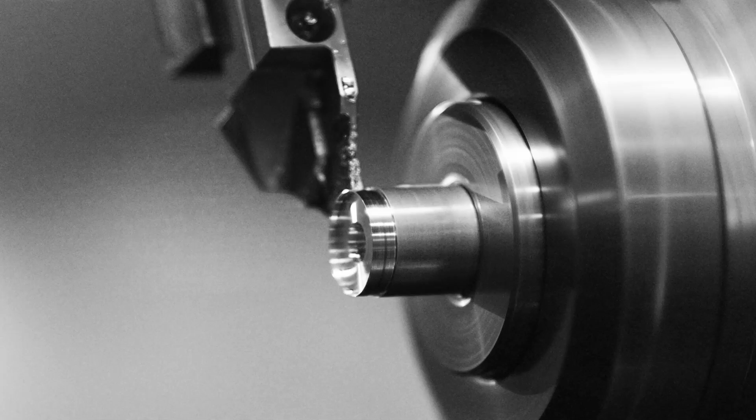Today I'm going to tell you about a machine that is available from stock at MTD UK. This is a Correa Norma 20 milling machine.

These machines are very popular amongst companies that need or demand flexibility within their machine shop and have requirements for a much bigger working envelope.

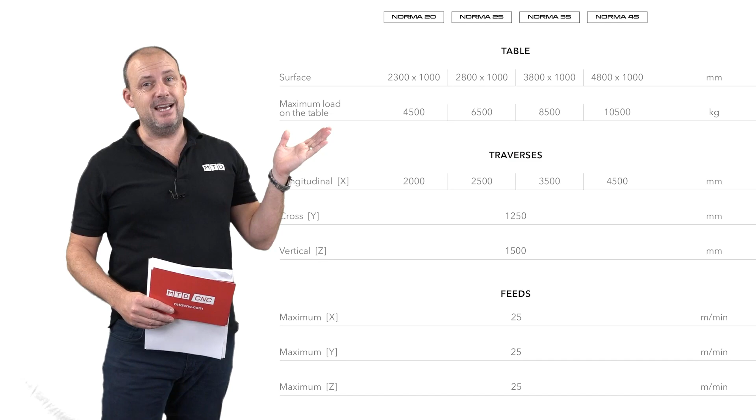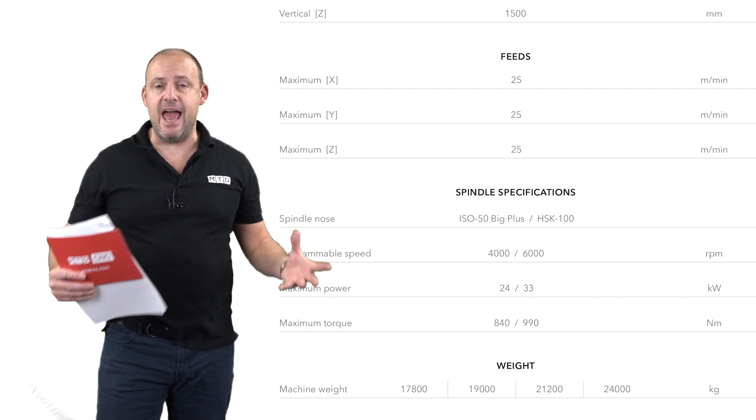We're going to put on screen now some of the specifications of this machine. You'll see we've got a 2 meter X-axis, a 1.25 meter Y-axis, and also a meter and a half in the Z. This enables companies using machines like this to not only handle heavier and larger components, but also to get more versatility in their machining by maybe having two different components or two different jobs on the table.

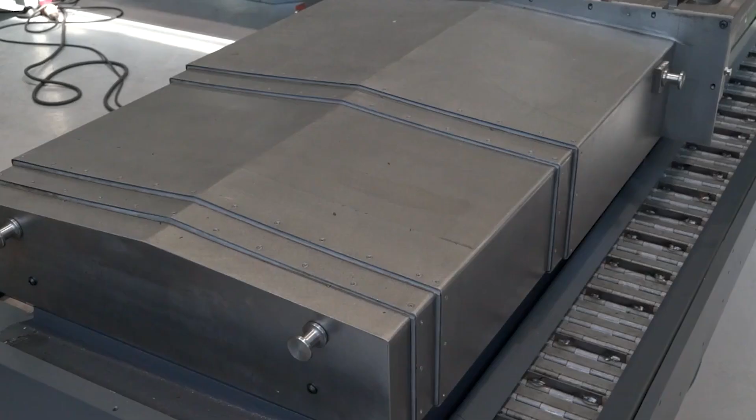This particular machine is a very cost-effective model. In fact, the Norma has been selling around the world for many years and does fit into traditional machine shops.

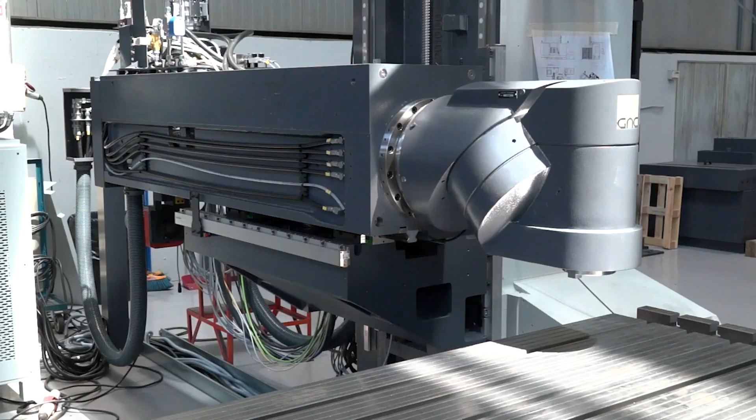Interestingly, the head on this particular model is quite a basic head. It's a manual positioning head, but this brings the cost right down on these machines, while still giving maximum flexibility to not only machine the top faces, but also do those angled features as well. The particular model we're talking about in stock is available on a very short lead time.

As standard, this machine comes with either a Heidenhain or a Siemens control. You can have either control with this machine, and there are models available with either of those. It comes with things like the portable hand wheel.

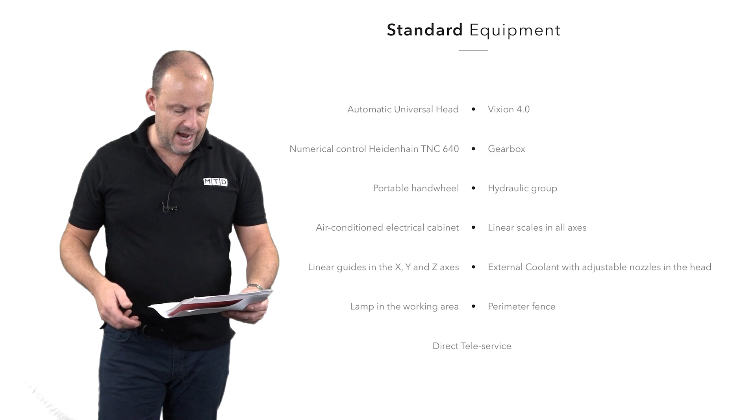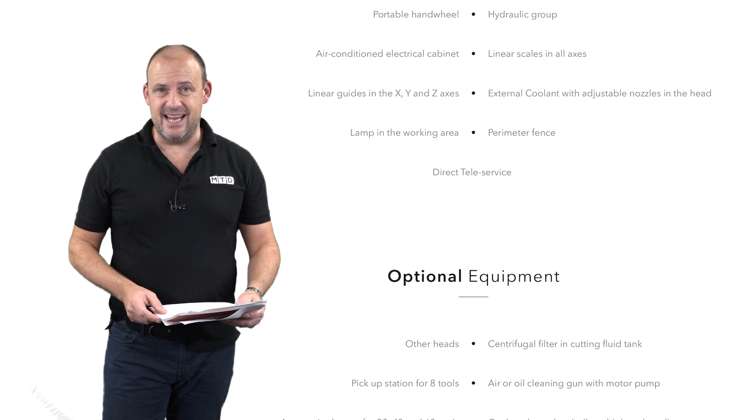The machine is fully air conditioned, so you're not going to experience the growth that you may on other machines. It also has linear guides as the driving motion in the X, Y and Z, and linear scales across all axes in order to maintain accuracy from one side of that big table to the other.

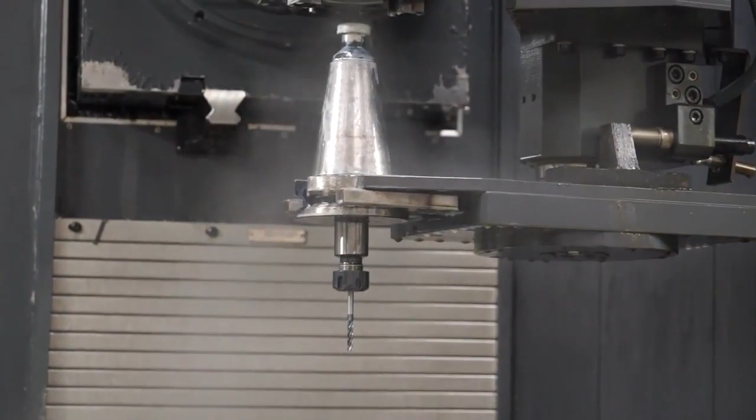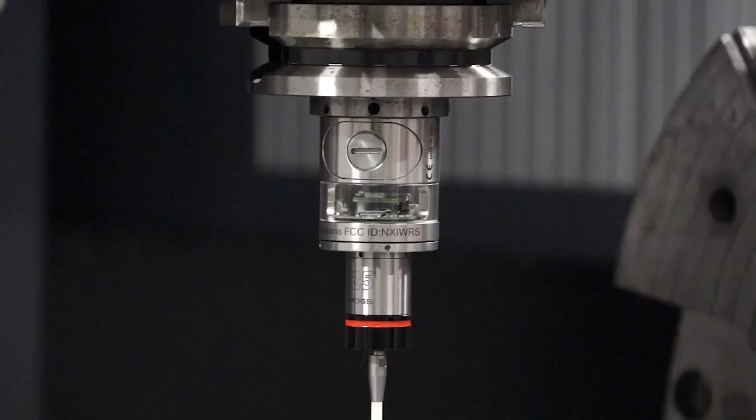The Experta offers high precision thanks to the mechanical ram droop correction system. It's a very sturdy machine as well, thanks to structural elements with large sections together with an L-shaped ram guide system - a flexible machine suiting machining of both finishing and roughing operations.

So generally, the machine I'm talking about here, the Correa Experta 20, available from DTS in the UK, is aimed at manufacturers that need a bigger working envelope but don't necessarily need an automated head, and still want the benefit of being able to position that head manually.